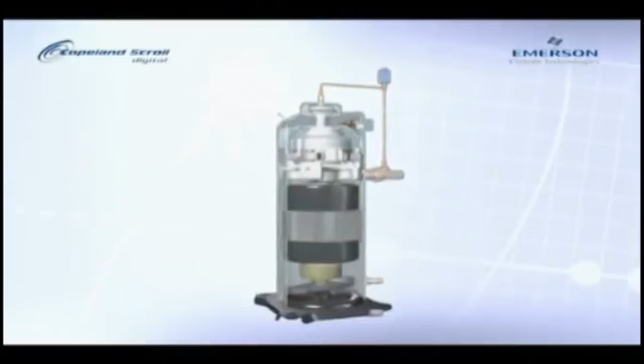The Copeland digital scroll compressor. Air conditioning and heat pump technology that allows capacity control better than any other variable capacity compressor can, from 100% down to 10%.

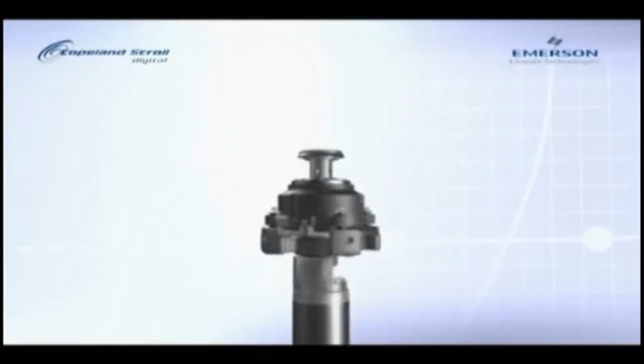30% of operating costs can be saved because air conditioning systems spend most of their time at less than full load, and digital scroll compressors use less power at reduced capacity.

Here you can see inside the digital scroll compressor and glimpse its unique method of operation. It's very simple really. When it pumps, it pumps, and when it doesn't, it doesn't.

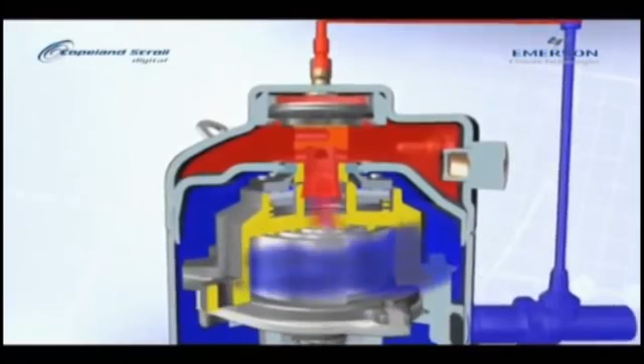Come on a journey as we tell all about the magic of digital scroll compressors, how they work, what the service engineer can expect to experience, and how they will benefit the end user. In just a few minutes you'll be armed with the knowledge necessary to understand the technology and be able to spread the word to other engineers and, more importantly, the customer.

First, let's see a real-life Copeland digital scroll compressor in operation. This was filmed in Temperzone's own R&D test laboratory, so there is a little bit of background noise.

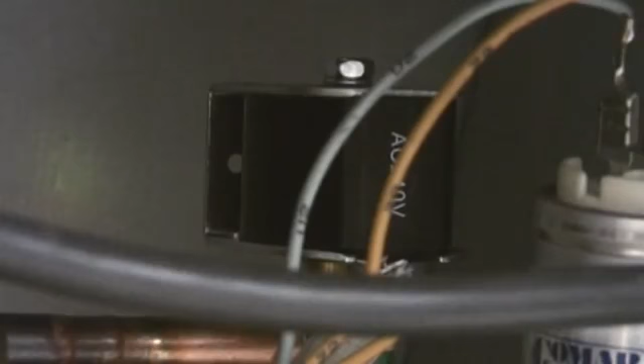A serviceman once complained to me that there was something wrong with the system, as the pressures were all over the place. He couldn't get the system to settle. I asked if he could hear the solenoid valve clicking every few seconds and the compressor tone changing, and then explained how these are normal operational symptoms for a digital scroll compressor at part load.

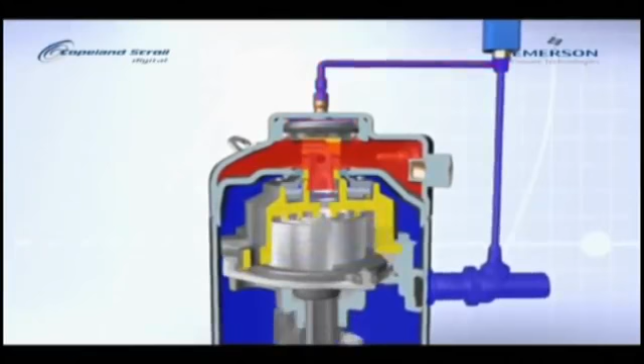How long it stays pumping compared to how long it is bypassing is based on how much load is required at that time. Let's have another quick look inside to see what is happening. The scrolls, when together, are initially pumping, but then as the solenoid valve lifts the top scroll, the pumping ceases.

The effect can be seen here on this compound gauge, as the solenoid valve releases, so the compressor pumps and the pressure falls. When the solenoid valve energizes, the pressure rises.

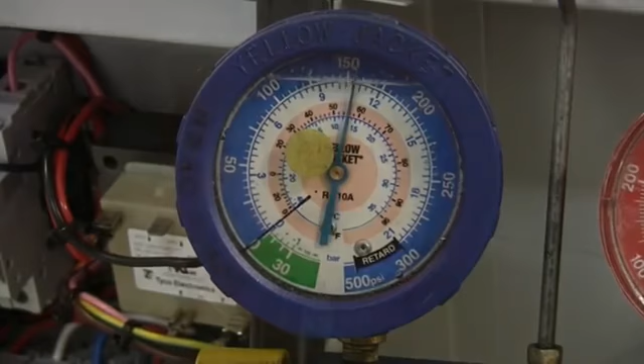Conversely, on the head pressure gauge, as seen here, the pressure rises when under load and falls as the solenoid valve energizes.

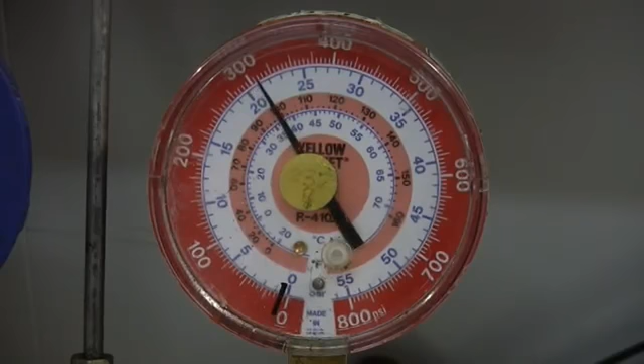The same is reflected in the amps that the compressor is drawing. On this compressor, when under load, the amps drawn are about 5.6 amps per phase, dropping to about 3.8 amps per phase when the solenoid valve is energized.

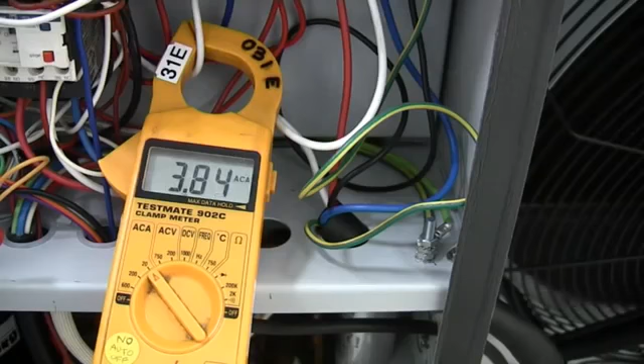This is where the power saving occurs. On this example, the compressor is only using 68% of the energy when unloaded. The average power usage is dependent on how much time is spent on either cycle.

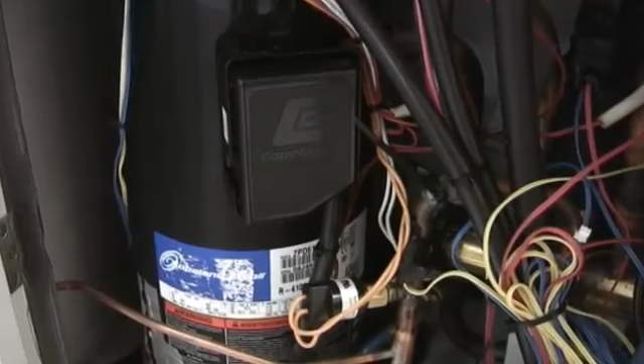Usually, the driving signal is a variable voltage signal such as 0 to 10 volt DC that is then converted to a pulse width modulation effect that is sent to the solenoid valve.

Okay, time to look into the workings of the digital scroll compressor. First, let's familiarize ourselves with the standard scroll compressor.

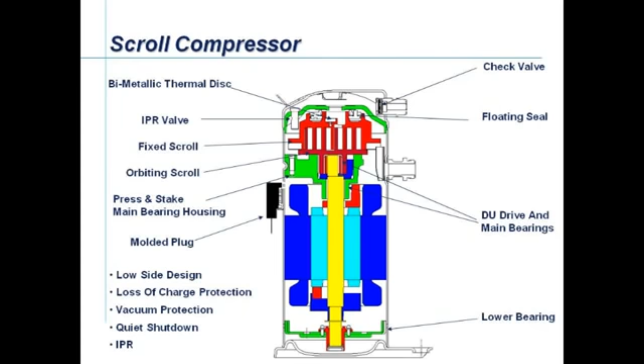The motor, shown in blue, drives the shaft, shown in yellow, and this has an eccentric at the top end to move the bottom scroll, dark red, in an orbiting motion. The brighter red is the fixed scroll at the top.

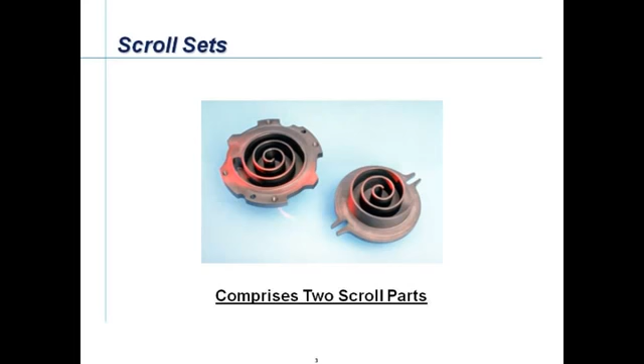Here we see the two scrolls, the top fixed scroll to the left and the orbiting scroll with its guide slots to the right. When the scrolls are inserted in each other, if you could see inside, it would look like this, the black spiral being the top fixed scroll and the grey being the bottom orbiting scroll.

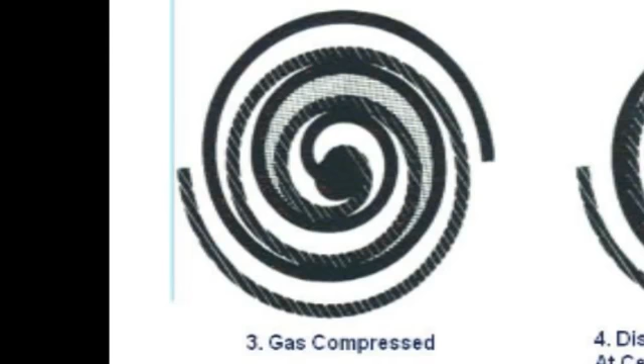Here we see 5 phases of operation. In the first picture, we see refrigerant gas being drawn in between the scrolls. The second picture shows the gas being trapped by the bottom scroll closing in on the fixed scroll as it orbits. The next picture shows the trapped gas is compressed as the pocket the gas is in becomes smaller in volume. This continues until, as in the fourth picture, the discharge pressure is reached and the compressed gas leaves via the discharge port in the center.

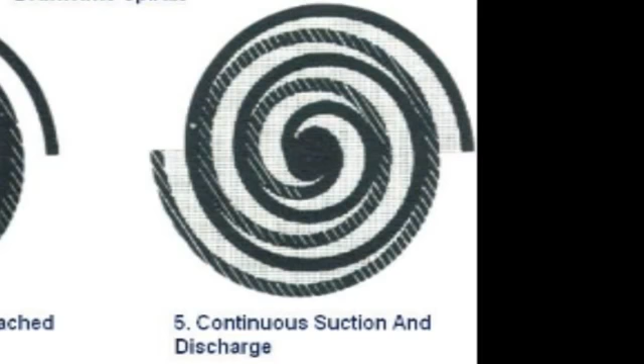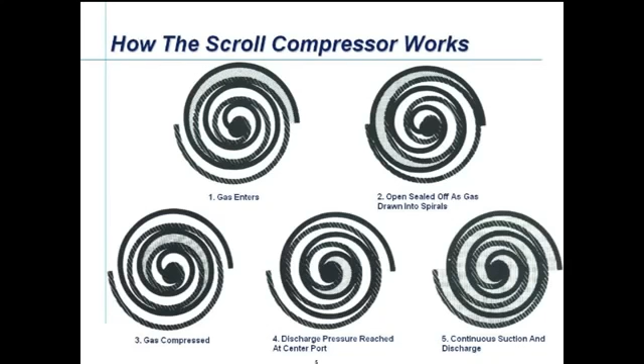The last picture shows that the process is continuous. As one pocket of gas is being compressed, another right behind it is being drawn in, and a third in front of it is being discharged. As the scroll has two entrances, this is actually duplicated.

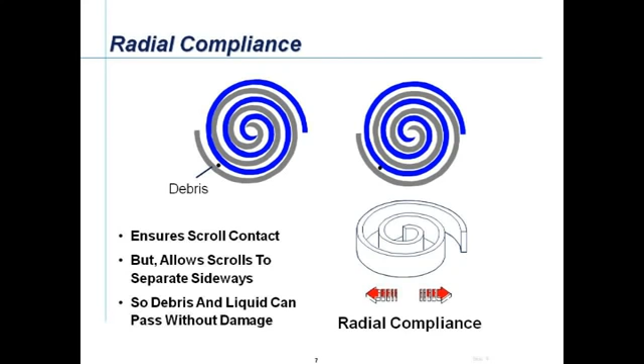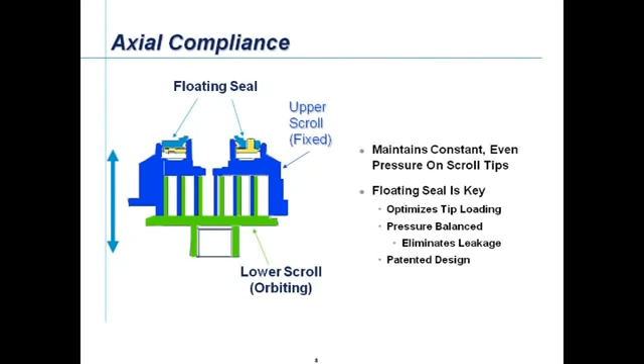There are some specific features of Copeland scroll compressors that other compressors don't have. Radial compliance allows the scrolls to separate sideways should any debris or liquid droplets enter the scroll. Axial compliance is by a patented floating seal that maintains even and constant pressure on the tips of the scroll. The tips are metal to metal contact, so tips don't wear out, unlike other designs where different materials are used and are fixed to the scroll tips.

Scrolls wear in and don't necessarily achieve full performance on initial startup.

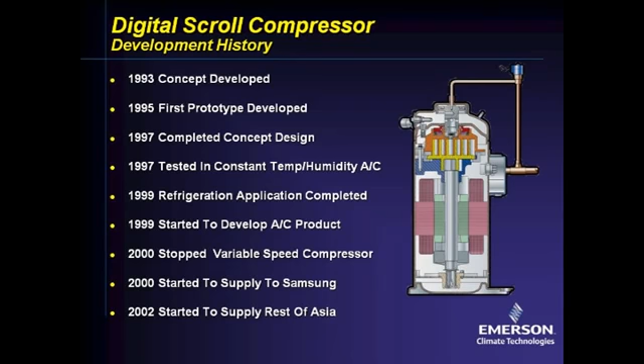Now let's move on to the digital scroll concept. As you can see from the history, it is a fairly new technology and really only introduced to air conditioning and heat pump applications around the turn of the century. Temperzone introduced digital scrolls into commercially sold units around 2006 and 2007.

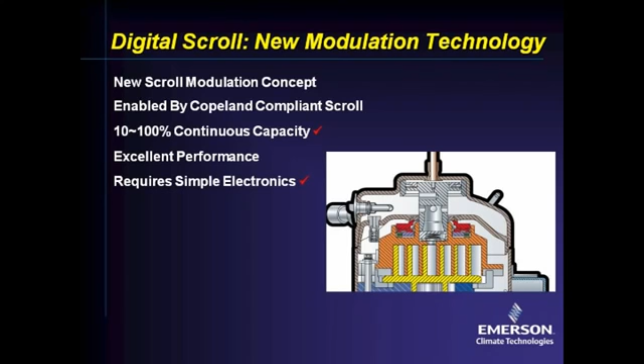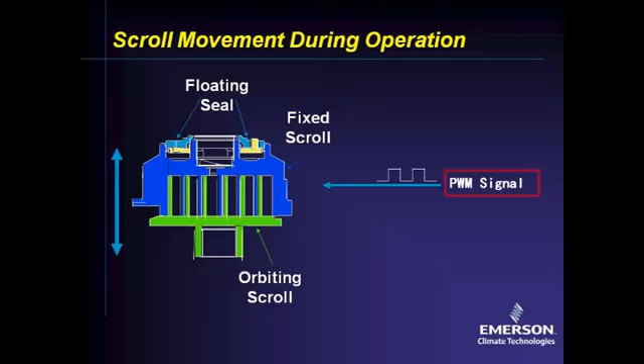Digital scroll technology does not require any complicated electronics or the multiple electronic expansion valves usually associated with inverter compressors. The concept is simple. It modulates, and can modulate down to 10% and anywhere between 10% and 100%. It really is quite simple.

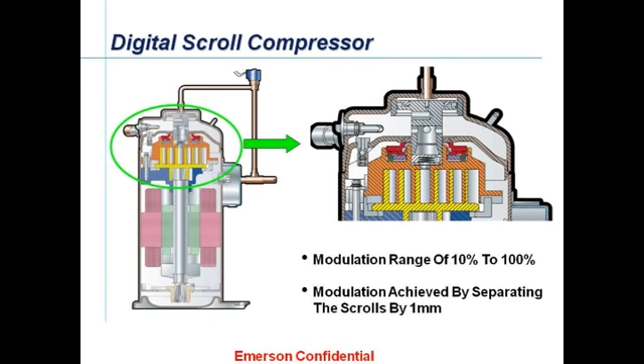The previously fixed scroll of a standard scroll compressor becomes a non-fixed scroll, and this can be lifted to separate the scrolls axially by just 1 mm. The compressor then no longer compresses the gas and the system starts to equalize. A few seconds later the scrolls are back together and the compression cycle continues.

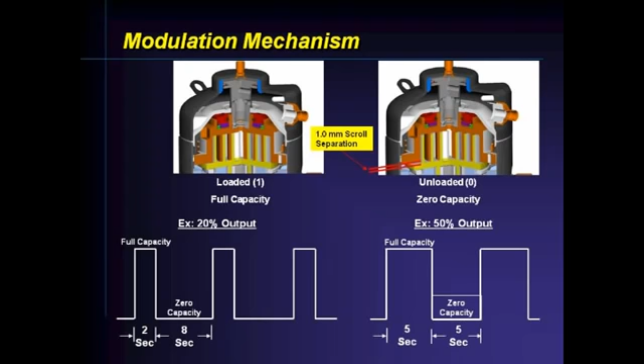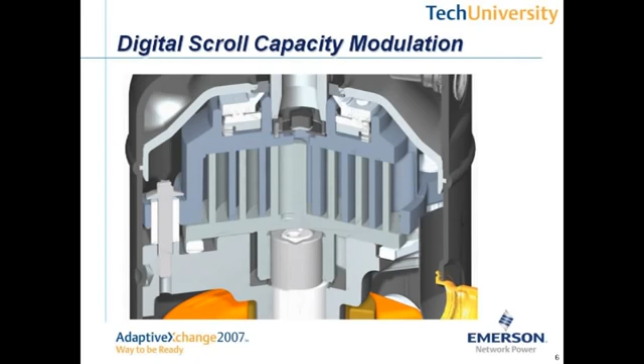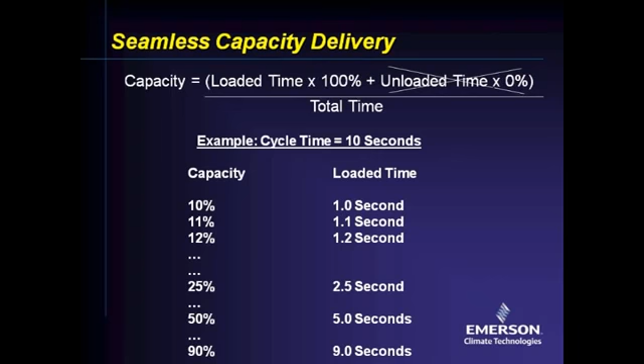Let's assume the driving signal is a variable voltage signal such as 0 to 10 volt DC. This is then converted to a pulse width modulation signal that is sent to the solenoid valve. If the required load is about 25%, then the compressor will run loaded for 2.5 seconds out of 10 and be unloaded for 7.5 seconds. At 90% it would run loaded for 9 seconds and unloaded for 1 second. At full load there would be no solenoid valve switching at all, and below 10% load the compressor turns off.

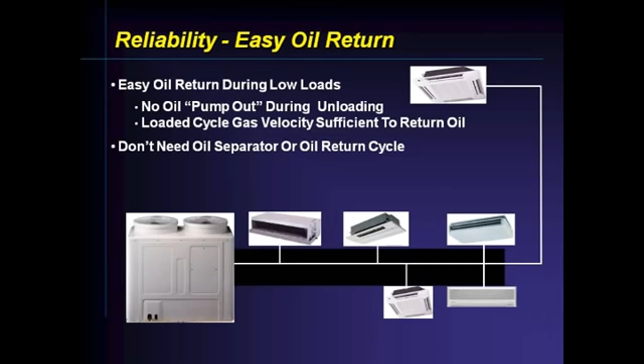No oil return cycle is required, and there is no need for an oil separator because no oil is pumped out when unloaded, and full pumping of the oil occurs when loaded. Unlike inverter compressors, digital scroll compressors produce negligible electromagnetic interference, certainly well below the regulatory levels, especially in the area of the 5th and 7th harmonics.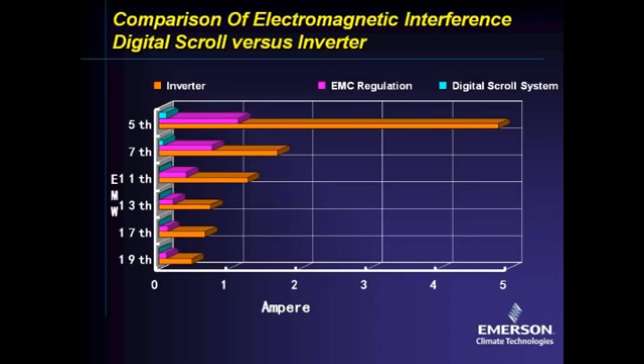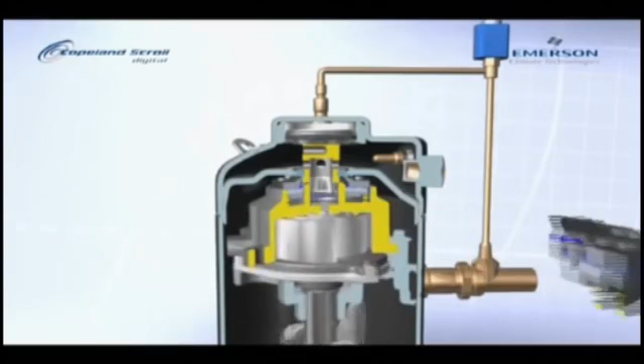Now we can see the scrolls in the engaged and loaded condition, and compression is taking place. Then, as the solenoid valve energizes, we see the top non-fixed scroll lifting just a millimeter, and all compression ceases. The cycle repeats and repeats continuously as dictated by the control signal.

So, to recap: seamless capacity control from 100% down to 10%, operating cost savings of about 30%, better humidity control, and negligible electromagnetic interference. Copeland digital scroll compressors are available in air conditioning and heat pump units manufactured in Australia and New Zealand by Temperzone Limited.